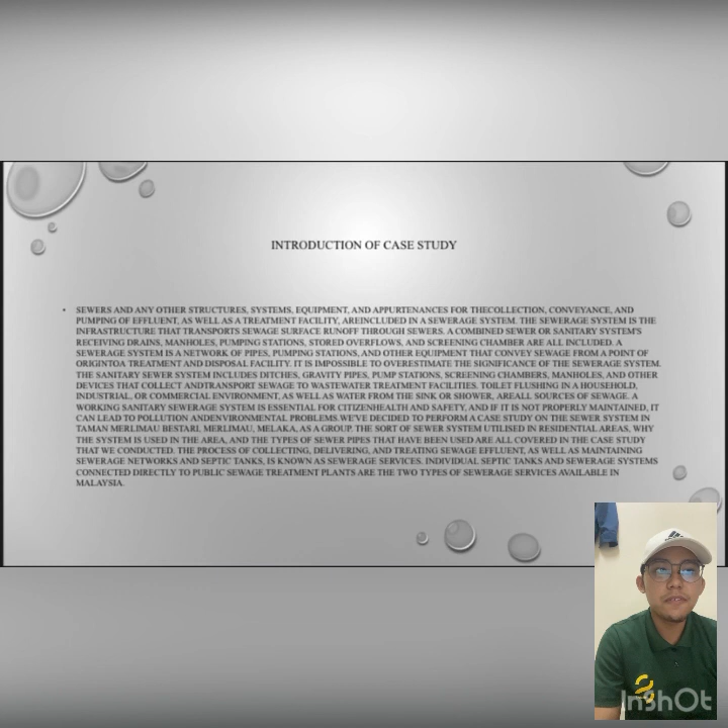I want to talk about the introduction of the case study. A sewerage system is a network of pipes, pumping stations and other equipment that convey sewage from a point of origin to a treatment and disposal facility. Toilet flushing in a household, industrial or commercial environment, as well as water from the sink or shower, are all sources of sewage. So next, the type of sewer system.

Taman Merlimau Bestari uses a gravity-operated underground sewerage pipeline, pumping stations, sewage treatment plants and sludge treatment facilities. As a result, sewage treatment plants are usually constructed along drainage catchment systems in order to collect sewage rapidly and inexpensively.

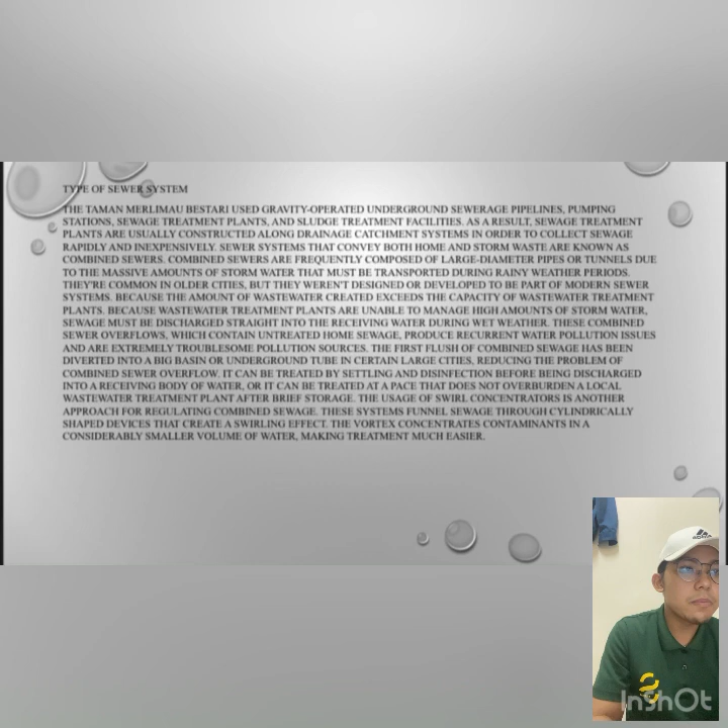Sewage treatment plants are usually constructed along drainage catchment systems. Sewer systems that convey both home and storm waste are known as combined sewers. Taman Merlimau Bestari uses gravity-operated underground sewerage pipelines, pumping stations, sewage treatment plants and sludge treatment facilities.

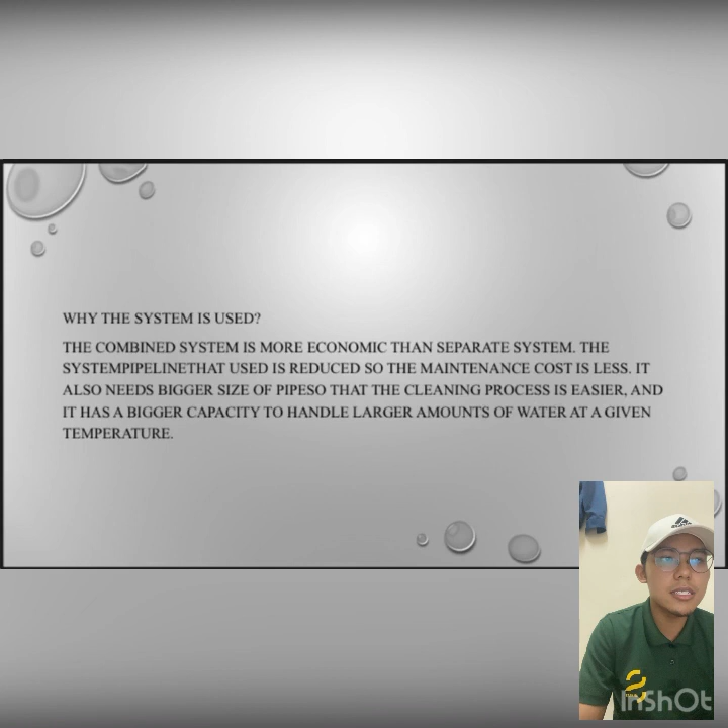So, why is this system used? The combined system is more economic than the separate system. The pipeline used is reduced, so the maintenance cost is less. It also needs a bigger size of pipe so that the cleaning process is easier, and it has a bigger capacity to handle larger amounts of water at a given temperature.

Types of sewer pipes used: UPVC. The UPVC pipe is a plastic pipe made of polyvinyl chloride, PVC resin, containing no plasticizer. With the development of chemical industry technology, it is now able to produce non-toxic grade pipes. It has the function of usual polyvinyl chloride, with some excellent added functions. Specifically, it's corrosion resistant and has softness, so it is especially suitable for water supply networks.

Because it is not electrically conductive, it is not easy to react electrochemically with acid, alkali and salt. Acid, alkali and salt are difficult to corrode, so no external anti-corrosion coating and lining are needed. The softness is good, which overcomes the defect of the brittleness of the plastic tube and can be bent under the load so as not to break.

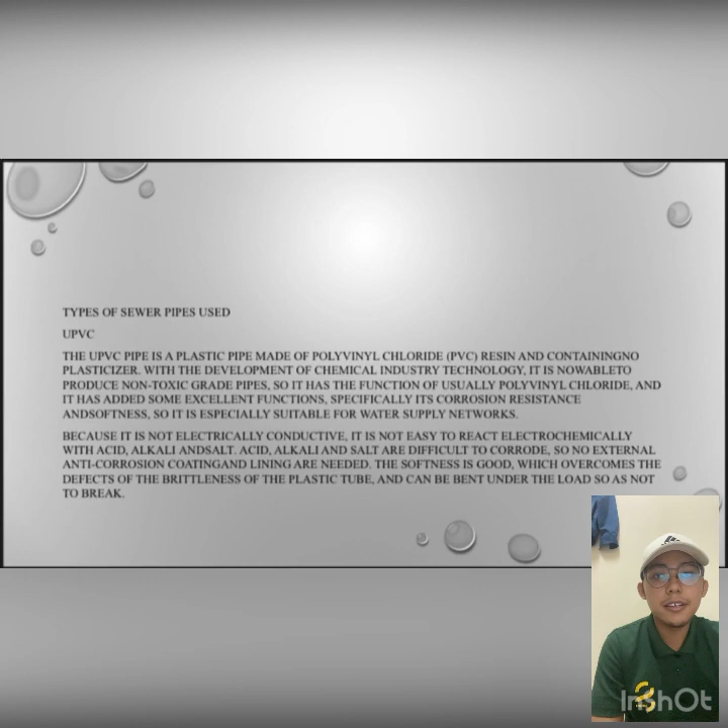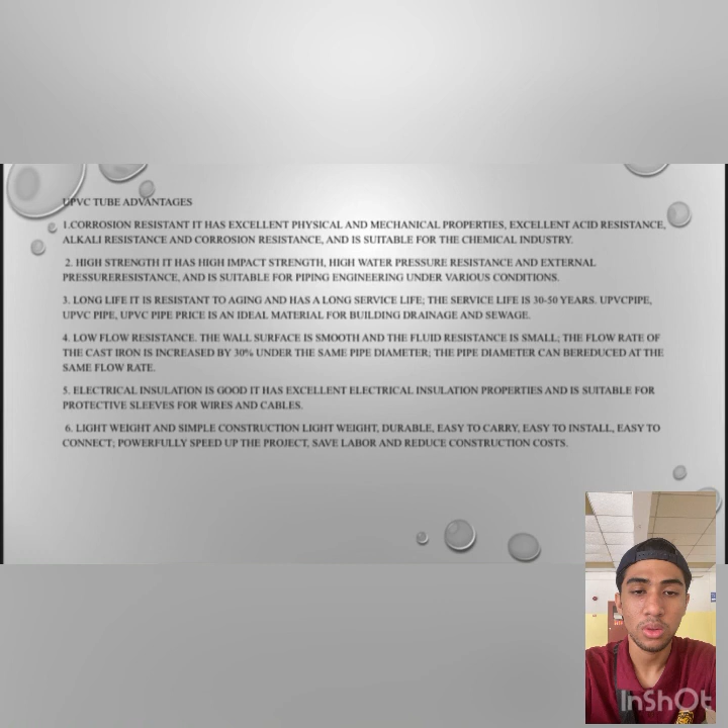UPVC advantage number 1 is corrosion resistant. It has excellent physical and mechanical properties and is suitable for the chemical industry. Number 2 is high strength. It has high impact strength, high water pressure resistance, and is suitable for piping engineering under various conditions.

Number 3 is long life. It is resistant to aging and has a long service life of 30 to 50 years. Number 4 is low resistance. The wall surface is smooth and the fluid resistance is small. The pipe diameter can be reduced at the same flow rate.

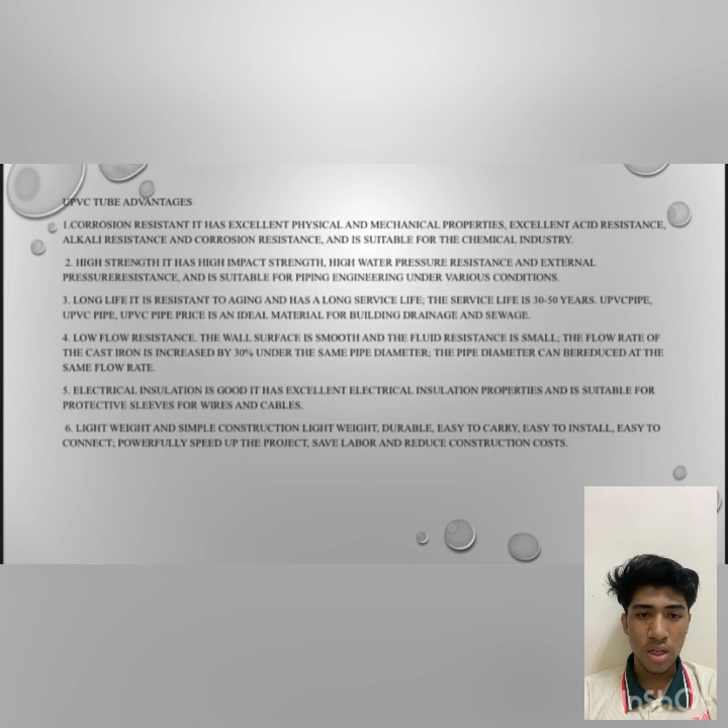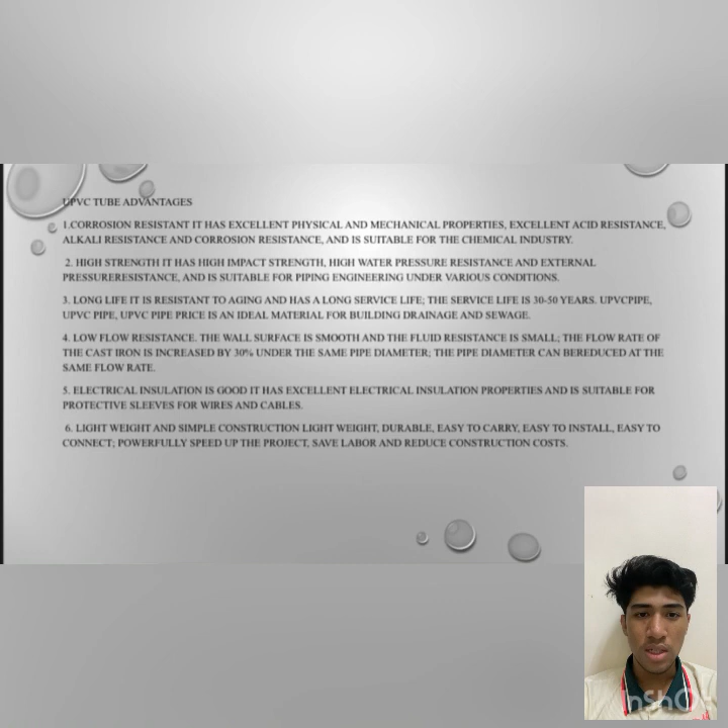Number 5 is electrical insulation. It's good, has excellent electrical insulation properties and is suitable for protective sleeves for wires and cables. Number 6 is lightweight and simple construction: lightweight, durable, easy to carry, easy to install, easy to connect.

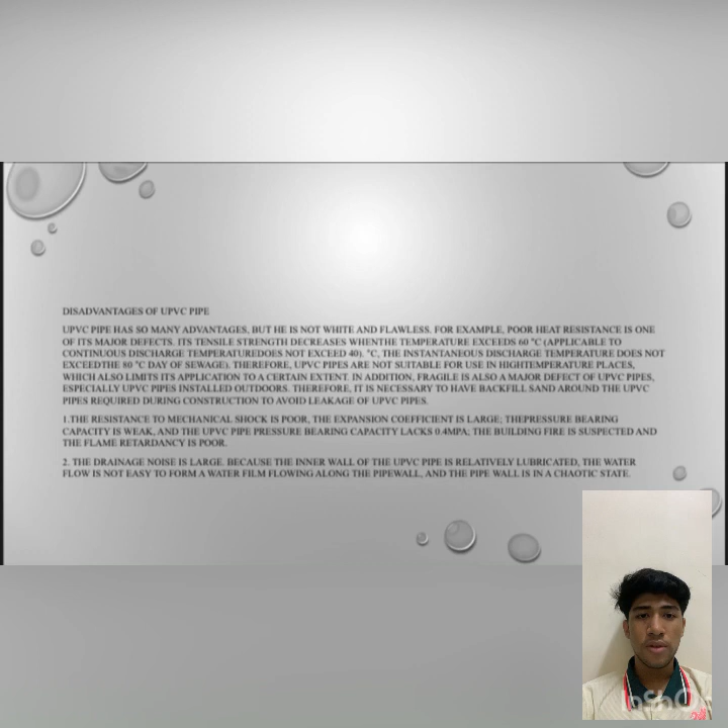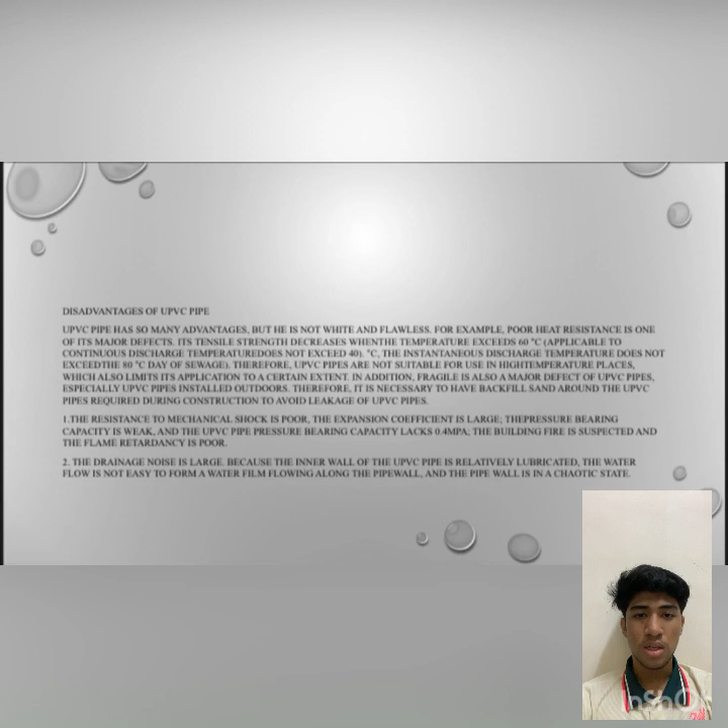Disadvantages of UPVC pipe: the resistance to mechanical shock is poor, the expansion coefficient is large, the building fire risk is suspected and the flame retardancy is poor. Number 2 is drainage noise is large. The water flow does not easily form a water film flowing along the pipe wall, and the pipe wall is in a chaotic state.

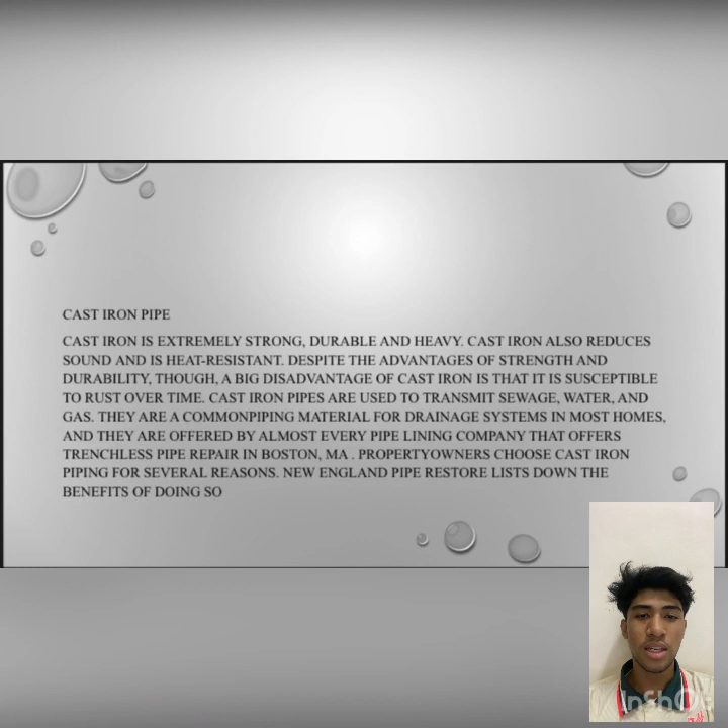Cast iron pipe is extremely strong, durable and heavy. Cast iron also reduces sound and is heat resistant. Cast iron pipes are used to transmit sewage, water and gas. They are common piping material for drainage systems in most homes.

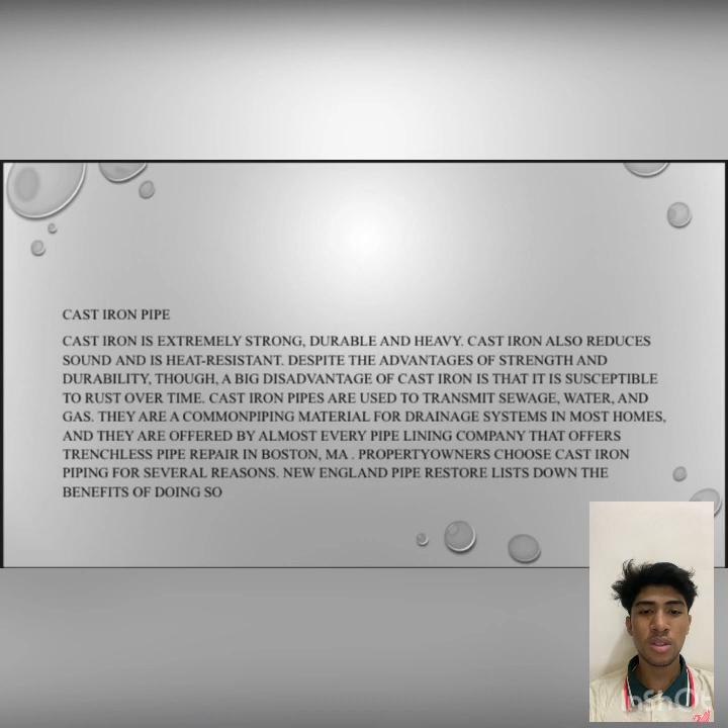Advantages of iron pipe: they are resistant to fire. The gases emitted in a fire accident during heating and combustion - cast iron doesn't emit gases or burn when temperatures are high. Number 2 is soundproof - cast iron pipes have soundproofing features and reduce the vibration and noise between pipes and plumbing fixtures.

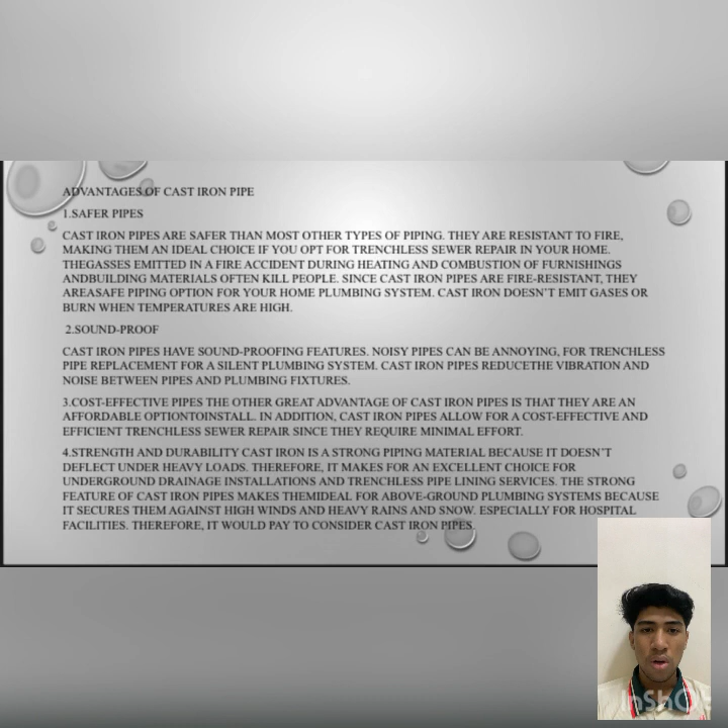Number 3 is cost-effective pipes. The other great advantage of cast iron pipes is that they are an affordable option to install. Number 4 is strength and durability. Cast iron is a strong piping material because it doesn't deflect under heavy loads. Therefore, it makes for an excellent choice for underground drainage installation and trenchless lining service.

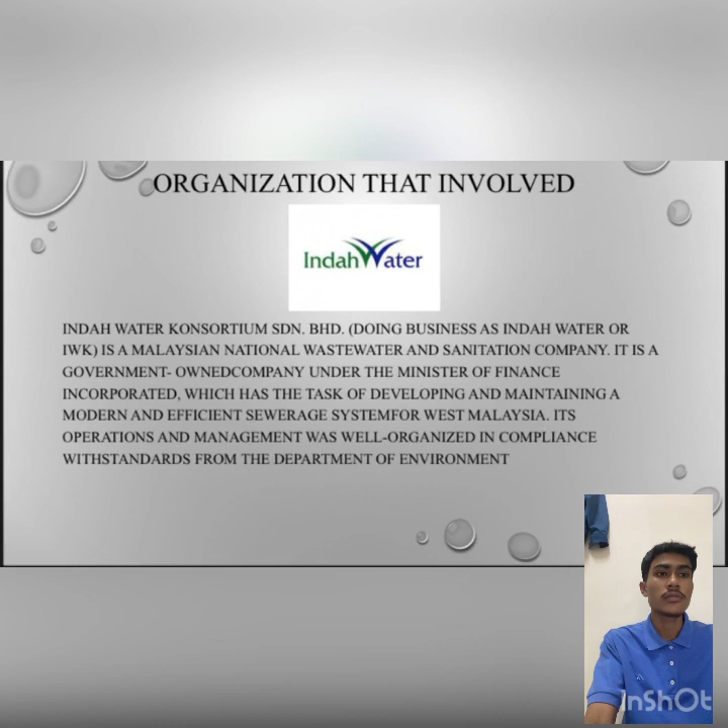Next is the organization involved, Indah Water. Indah Water Konsortium Sdn Bhd, doing business as Indah Water, is a Malaysian national wastewater and sanitation company. It is a government-owned company under the Minister of Finance Incorporated, which has the task of developing and maintaining a modern and efficient sewerage system for West Malaysia. Its operations and management are well organised in compliance with standards from the Department of Environment.

Next is the wastewater treatment process. Stage 1 is bar screening, the process of treating and reclaiming water from wastewater. Any water that has been used in homes, such as flushing toilets, washing dishes, or bathing, starts with the expectation that after it is treated, it will be clean enough to re-enter the environment.

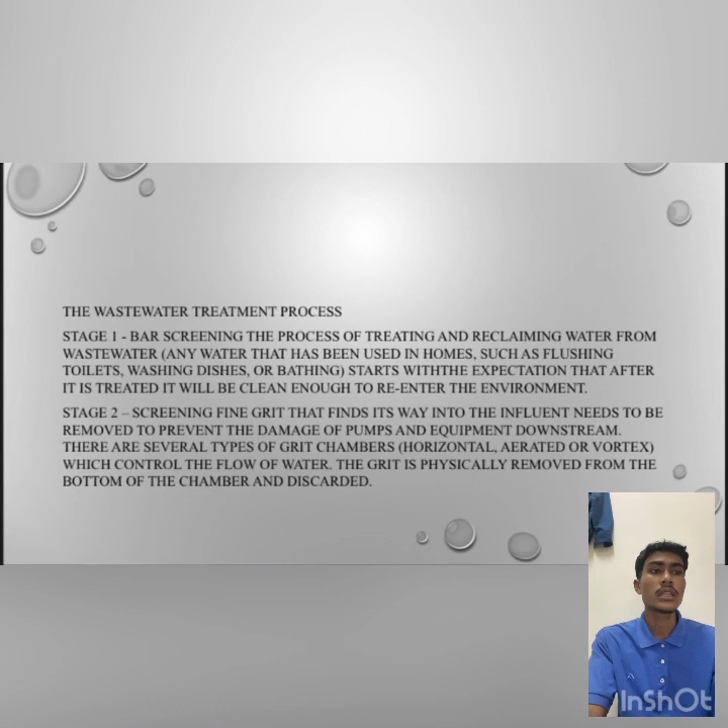Stage 2 is screening. Fine grit that finds its way into the influent needs to be removed to prevent damage to pumps and equipment downstream. There are several types of grit chambers: horizontal, aerated, and vortex, which control the flow of water. The grit is physically removed from the bottom of the chamber and discarded.

Next is stage 3, primary clarifier. Initial separation of solid organic matter from wastewater; solids, known as organic sludge, sink to the bottom of the tank and are pumped to a sludge digester or sludge processing area, dried and hauled away. Proper settling rates are a key indicator of how well the clarifier is operating. Adjusting the flow rate into the clarifier can help the operator adjust the settling rates

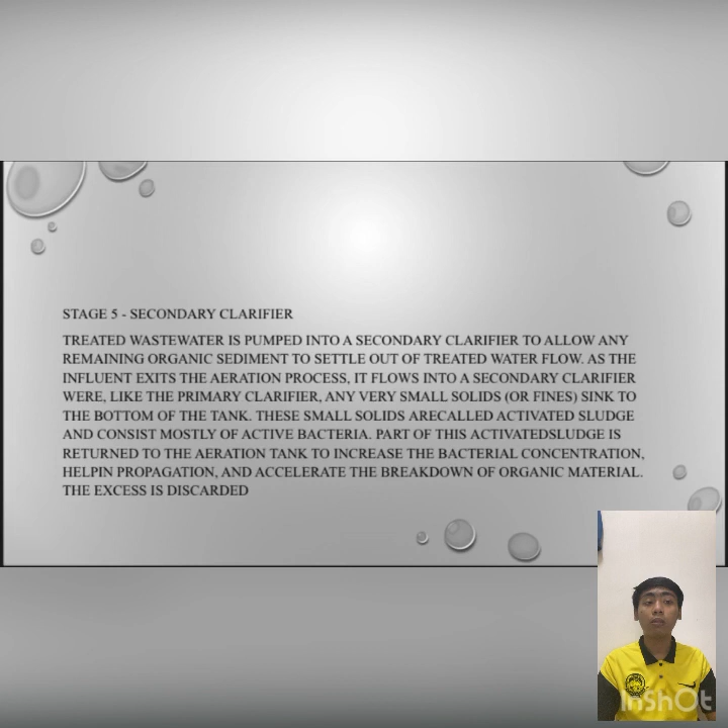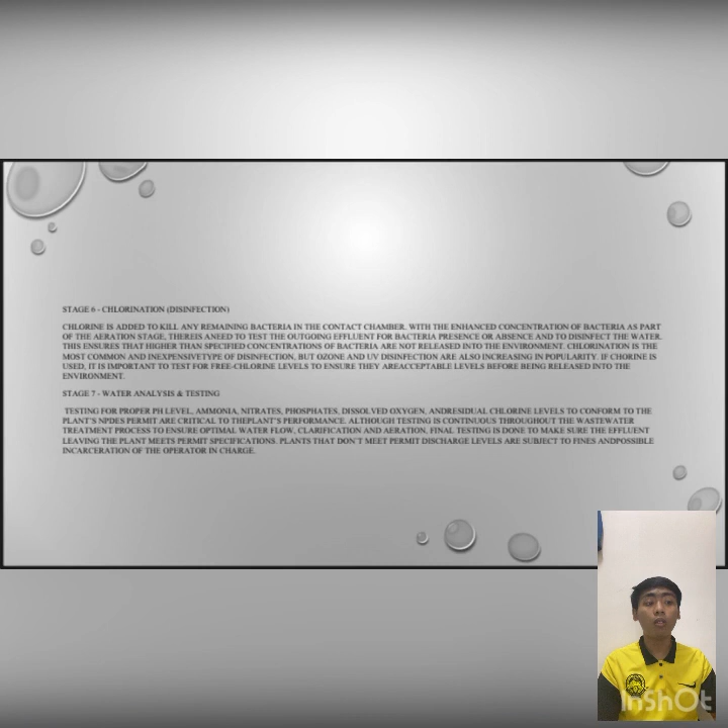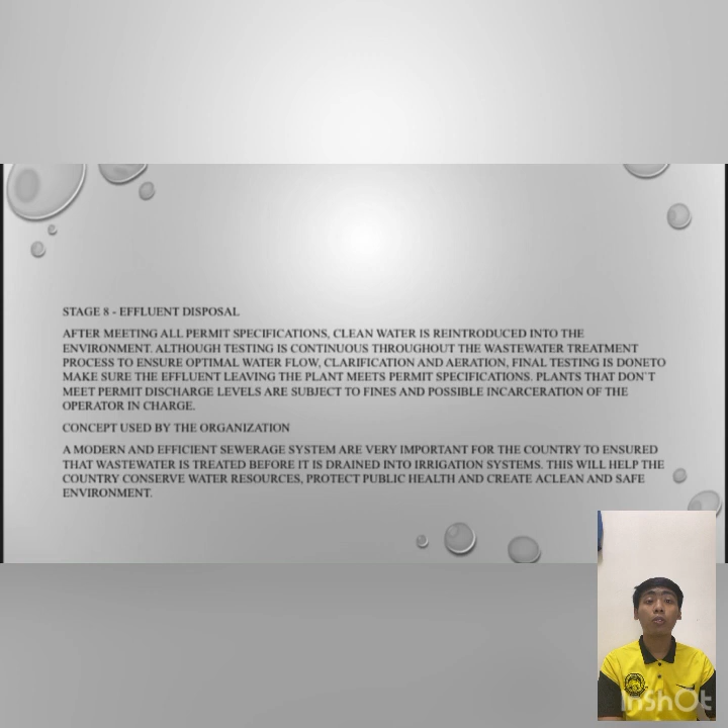We move to the last slide, which is stage 8, effluent disposal. As you can see on the slide, in effluent disposal the clean water is reintroduced into the environment. Testing is continuous throughout the wastewater treatment process to ensure optimal water flow, clarification and aeration. Final testing is done to make sure the effluent leaving the plant meets permit specifications.

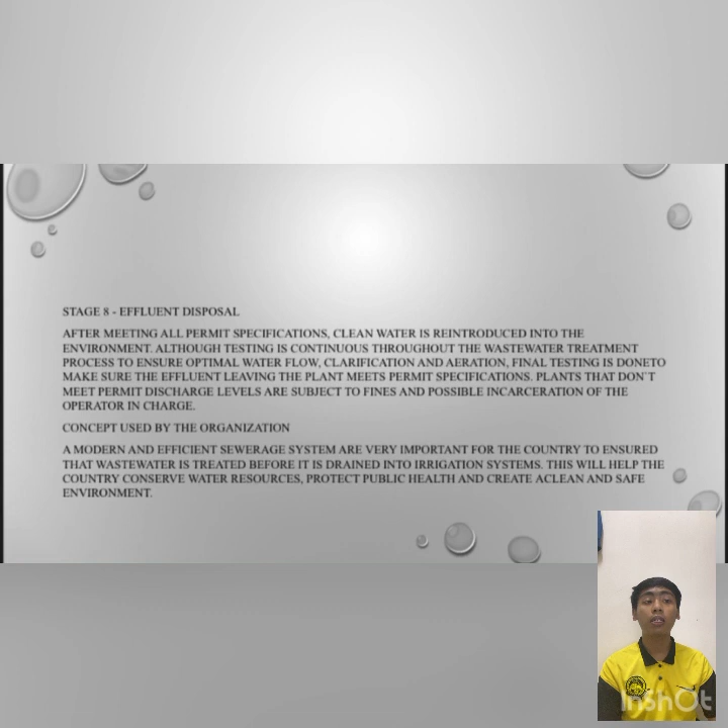The concept used by the organization, a modern and efficient sewerage system, is very important for the country to treat the wastewater before it drains into the irrigation system. This will help the country conserve water resources, protect public health, and create a clean and safe environment.